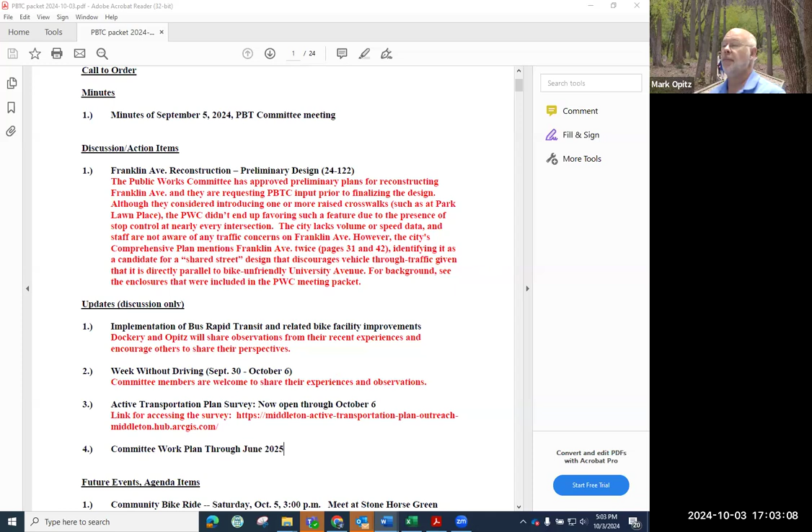So we have quorum. It is 5:03. Let's go ahead and get started. Do we have any corrections to the minutes?

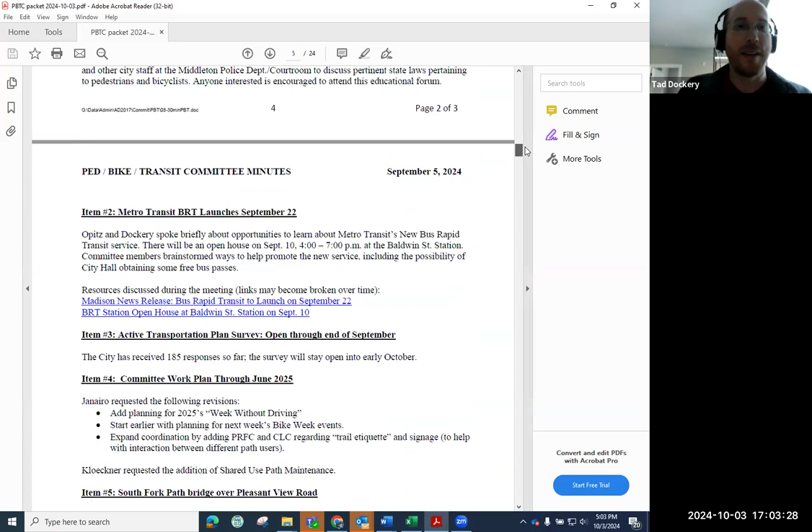I had noticed one typo at the bottom, item number 4. It accidentally says start earlier with planning for next week's bike week events instead of next year's. Oh, okay. And I think that was the only thing I saw. That's fair.

Well, I always put in one typo to see if somebody catches it.

Hearing no other changes to the minutes, they stand as read. All right, our big item, Franklin Road reconstruction. Franklin Avenue reconstruction, sorry.

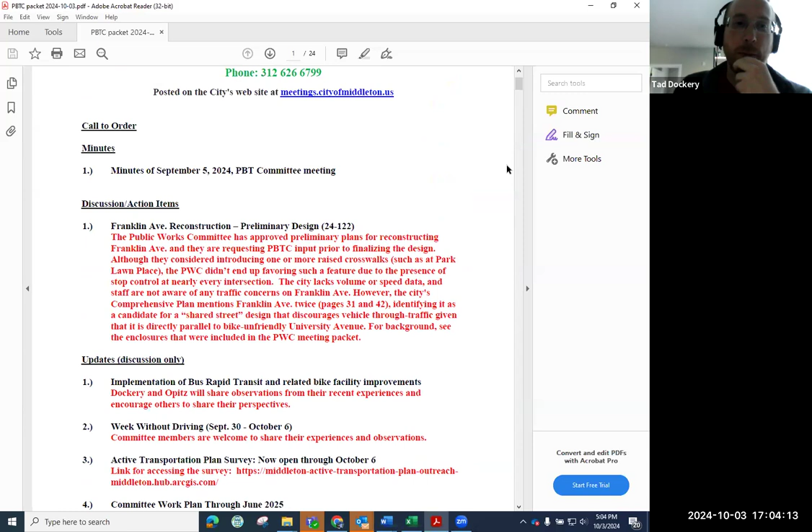Yeah. So the Public Works Committee earlier in September has been talking about how to design, are there any design changes as they prepare to reconstruct the street, developing a design for reconstructing the street. And so there was a referral, and Kerrie, I don't know if you were at the meeting. I didn't check the minutes, but I'm sure you could speak to this better than anybody on the call because you were there. So any questions about the intent of the committee? I guess Kerrie would be best positioned to answer that.

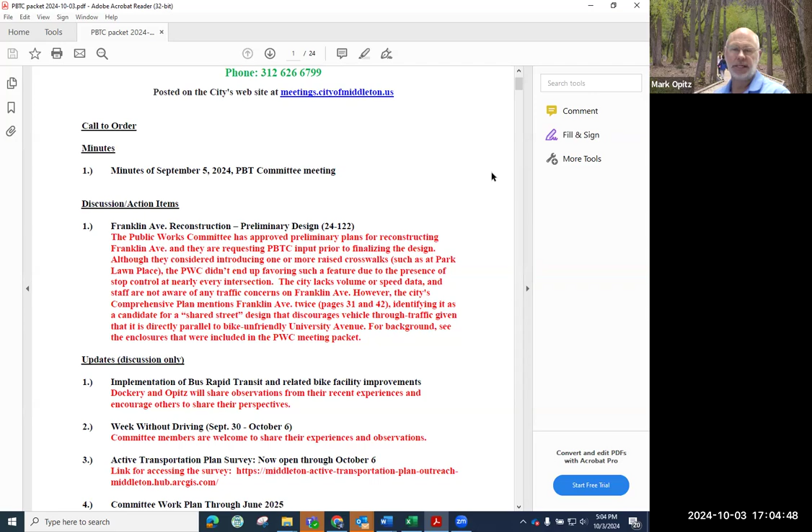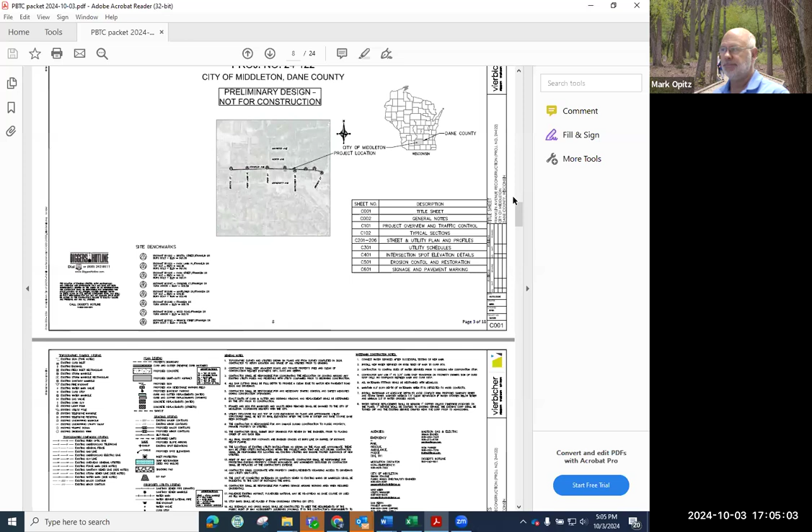But what I have in your packet is the materials that were given to the Public Works Committee, including the memorandum from the consulting engineer, and then of course the preliminary design. I will add that our comprehensive plan for the city, as I noted in the staff report, touches on this in a couple places, identifying it as a candidate for a shared street design that discourages vehicle through traffic. And we wrote that a couple years ago.

Be curious in anybody's perspectives on having biked along that route or walked along that route. I don't think it's too much of a problem at the moment, but obviously we are trying to be sensitive to complete streets and make sure that, given the limitations of University Avenue, there are suitable parallel routes, in this case, Franklin on the north and then Elmwood on the south. So I'll turn that over to the committee for discussion, and maybe Kerrie, you could shed any more light that needs to be shed.

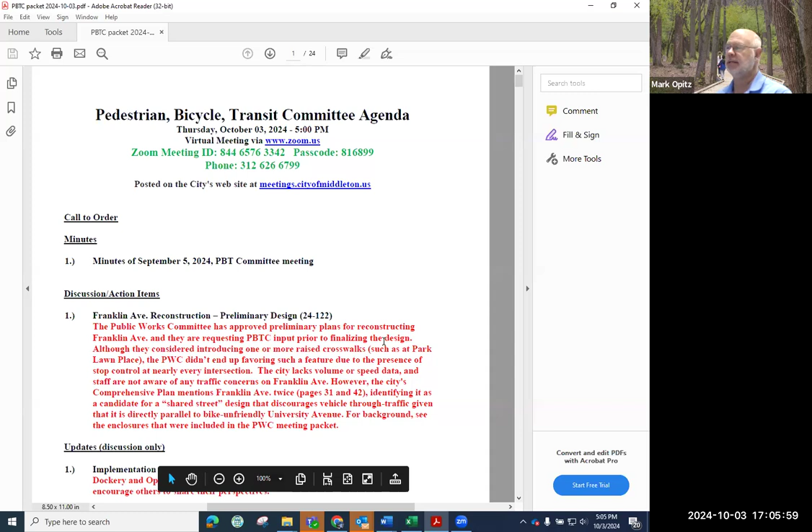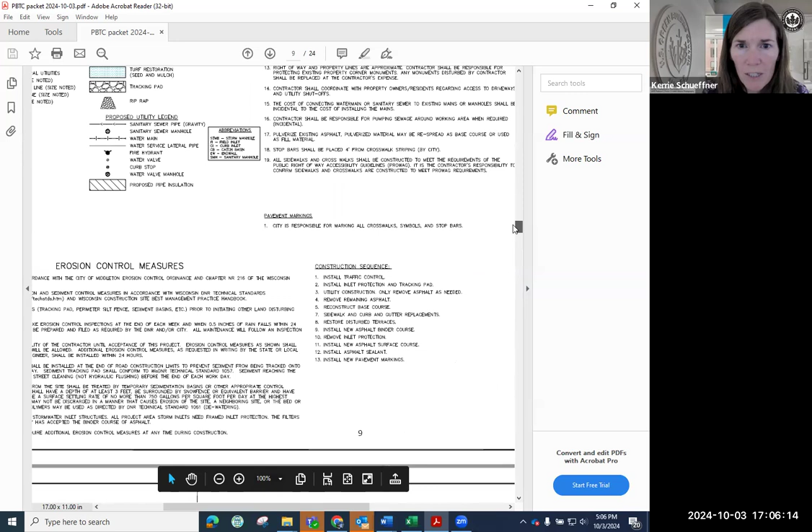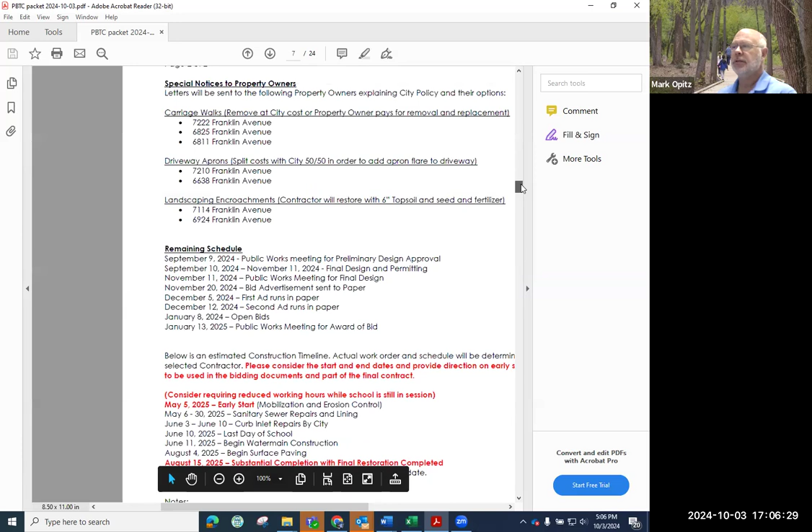Mark, can you remind us, are we just commenting on this final design? I was at the meeting, but were there any questions that were directly raised to the committee? Yeah, specifically one of the ideas that was raised, as I understand it, was raised crosswalks. I can't remember if I put the minutes of the Public Works Committee in here today. Maybe I didn't do that. You did. Okay. Well, not the minutes, but you did include the mention of the raised crosswalks. Was it my staff comments? Yeah, there we go.

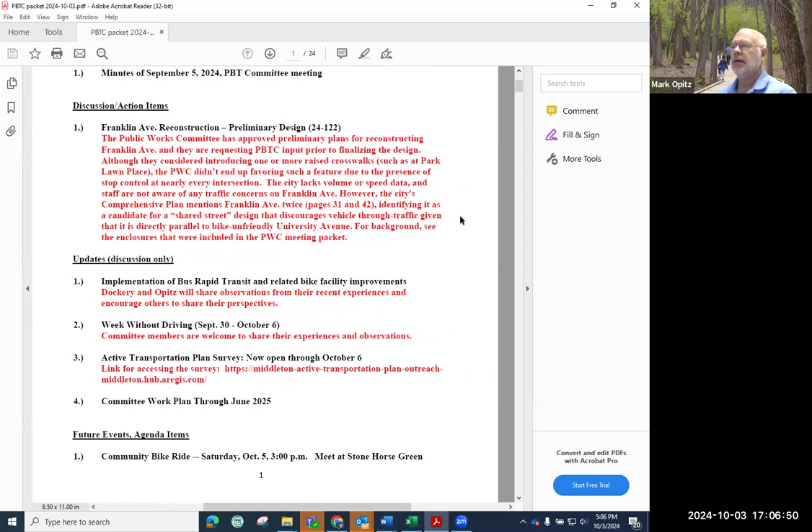Yeah, one or more raised crosswalks, such as at Park Lawn Place, and the committee decided not to favor such a feature. And the reason for that, what that means with stop control, let's go back to the map here. So if you start on the east, which is at Sauk Trail School, there's no stop control at Wood Road, but that also is a T intersection and hasn't been observed to have any problems there. People coming out of the T are supposed to be yielding, even when there's no sign.

At Mayflower, there are stop signs on Franklin heading east and west, and Mayflower is a north-south through street. Park Street is also a north-south through street, and Park Lawn is. So in this case, if you're traveling east on Franklin, you have to stop at Park Lawn. Well, actually, we were starting from the east, so the first stop you have is at Mayflower. Or do I have that backwards now? Wait a minute. Yeah, I think there's a stop at. Now I got to look that up. There's no north-south stops. There's only east-west stops. Exactly, that's what I thought.

So Mayflower. Yeah. Then you basically are stopping at every four-way intersection, not the three-way intersections. That's the quick summary. So at Bristol Street and then further west at Middleton Street, those are four-way stops. So if you are an east-west traveler along Franklin, you are stopping at every four-way intersection. So the Public Works Committee talked about whether it would be desirable to have any raised crosswalks, and they decided not to.

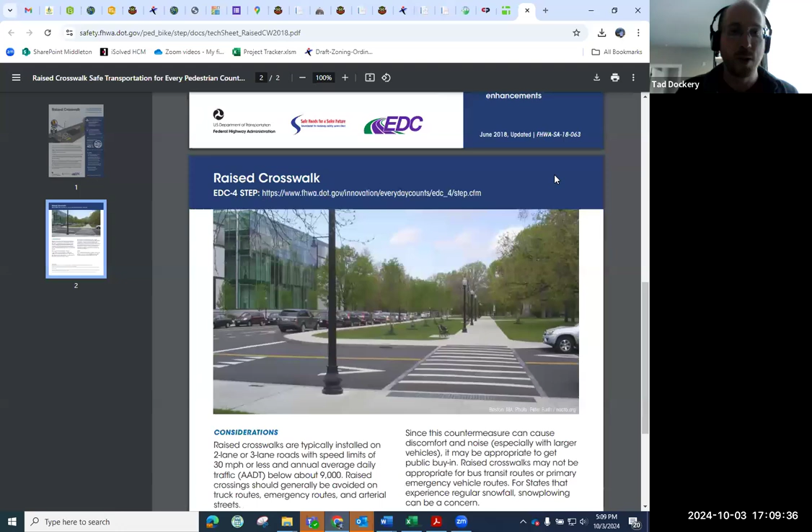So yeah, I put the link to the FHWA fact sheet. One of the images in there shows a raised crosswalk. If you scroll down, there's a photo on page 2, and you can see from the stop bar in the left of the image that that is at an intersection that has some kind of stop control. It might be a stop sign hidden behind that light pole. It could be a stop light across the street. The presence of stop control doesn't really say anything about whether a raised crosswalk is desirable.

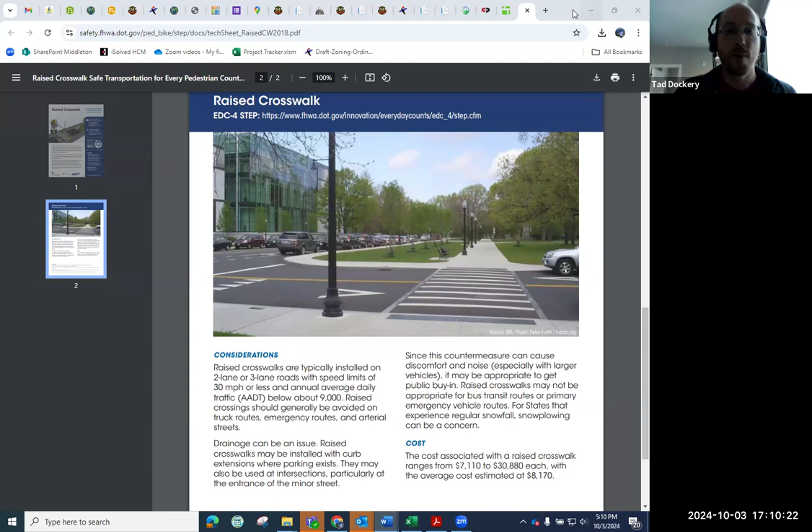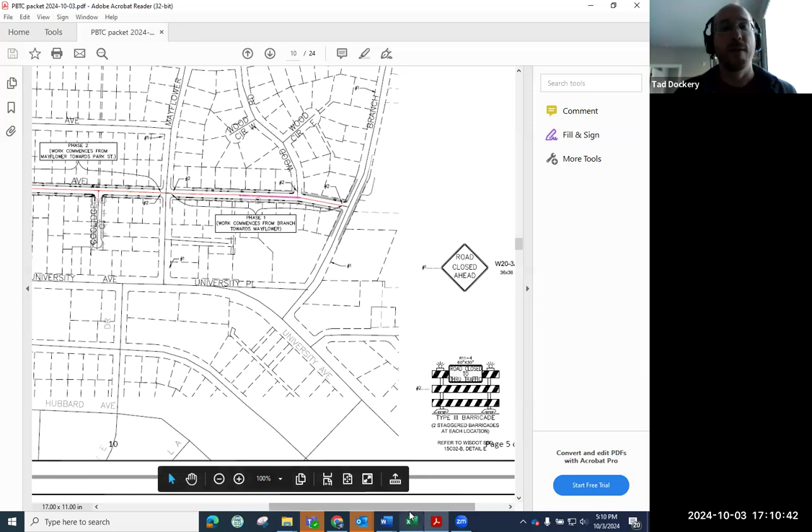In this case, the reason I mentioned the functional classifications: Franklin itself is a local, Park Lawn and Branch are both collectors. So it would be desirable to put raised crosswalks across Franklin on Park Lawn and then at Branch. So these would be north-south crosswalks. These help designate to people turning on or off the collector that pedestrians along the collector have priority.

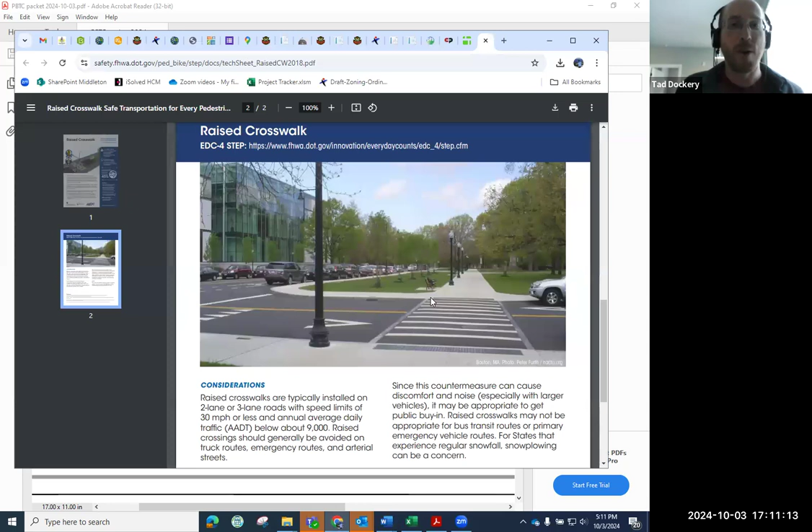So it's partly about visibility there. It's partly about reminding them that just because they're in a car, they aren't ruling the road. That's another thing about stop signs like that, is that a majority of drivers will tend to, intentionally or not, block the crosswalk. A raised crosswalk makes it a little more obvious not to do that.

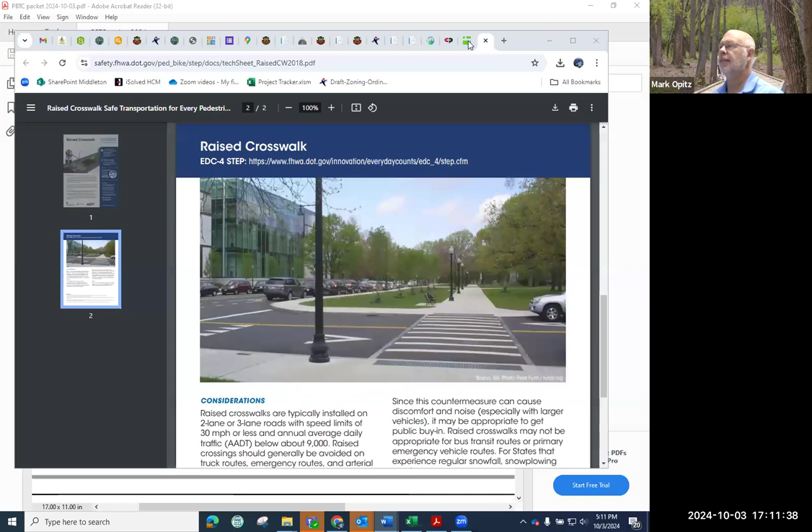And then while I'm on the explaining-why-I-asked-for-all-those-links kick, the shared street design. Yeah. So it was mentioned the possibility of making this a shared street. Shared streets are a wonderful thing. I don't think it's appropriate for this context if we truly intend for Franklin to be an alternative to University for cyclists. The relevant feature here is that shared streets slow everybody down as close as possible to walking speed.

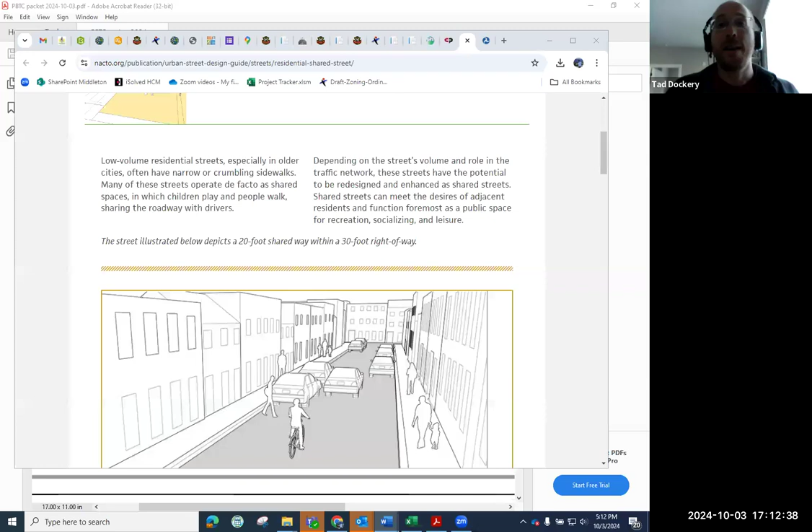The only people who should be spending any large amount of time on a shared street are people with destinations or origins somewhere along that street. So creating a low speed shared street like that, that we then send bicycle through traffic down, kind of misses the point. A better design for that is a bicycle boulevard, which was the last link.

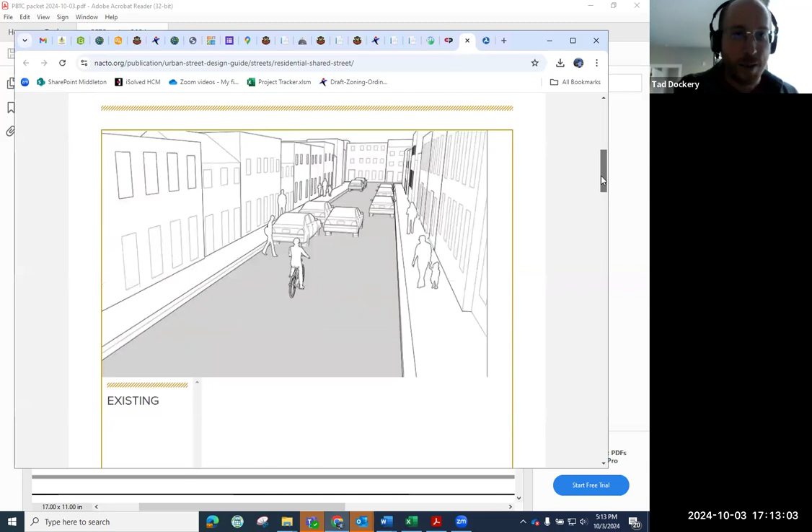Yeah, Mark, while we're here, if you click on the after picture, if you scroll up a bit. Oh, sorry, I don't know what you mean by the after picture. Yeah, so there's that spot. Oh, I see what you mean. Existing, and then it has underneath...

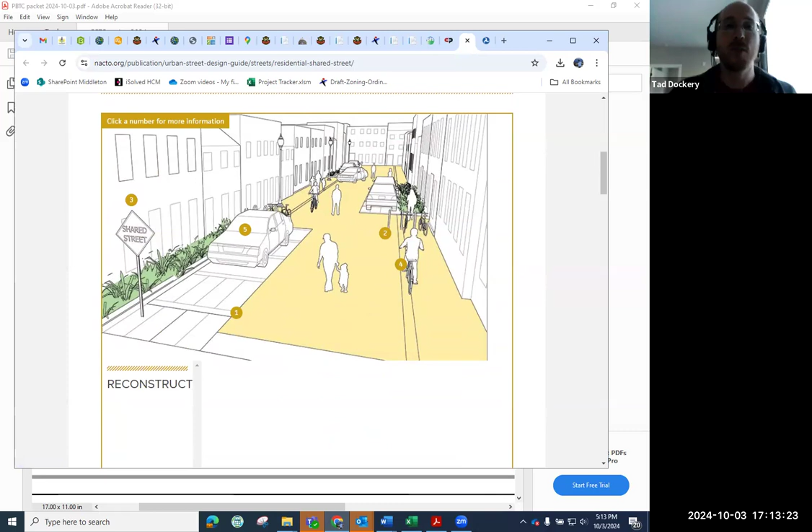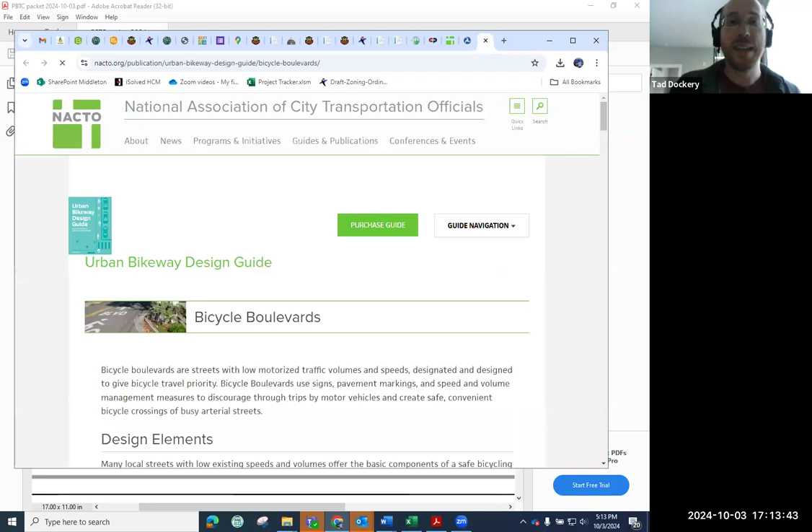Yeah, so if you see from the after, you can see the shared street, it's narrow. It alternates the sides of the street that on-street parking is on, so that drivers have to slow down and chicane around. It's perfectly reasonable for local bike traffic, but again, it's not really a good design for through bike traffic. So we kind of have to make a decision about our intention. If we intend Franklin to be an alternative to University for through bicycle traffic, then we're really more looking at a bicycle boulevard.

How long is it going to be before the next reconstruction? 25, 30 years, Mark? Well, yeah, I mean, we do seal coats and resurfacings and all that in between. Right, full reconstruction comes along once in a generation. Right. So if we wanted to bicycle boulevard it and put like mini roundabouts in the intersections, now would be the time.

The other thing I would point out is that this is the route to the Good Neighbor Festival Parade, and that has become quite well received from what I can tell. We're not going back to University Avenue for that parade. That doesn't mean Franklin will always be hosting the parade, but it is currently, and it will for the foreseeable future, as long as the festival is located where it is. So that's something else to take into consideration. And Tad, I think that context is super helpful.

And I think that's exactly what the Public Works Committee was kind of wondering, more of the reasoning of why the raised crosswalks would be beneficial. And that's where I do recall it was like, well, we're already stopping, right? So do we need these? So I think that context is super helpful.

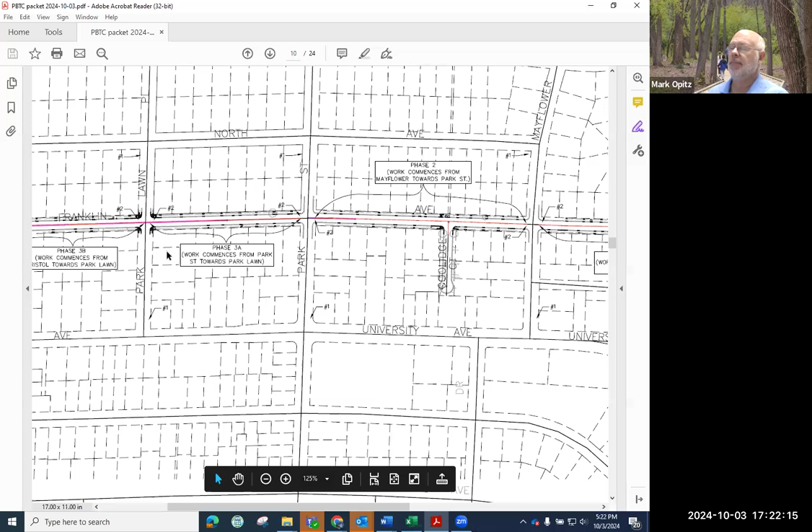And Tad, whenever that motion is, if we could include the benefits of why, I think that would be helpful. Okay. Mark, is this technically a motion for feedback? That's fine. Yeah, that'd be fine. If there's anything else, I think the discussion about the chicane effect was really helpful. I would agree. We don't want to introduce that here to have people weaving. Maybe I'm a little too biased because of my parade experience.

Well, okay, so I do want to come back to that because I do want to ask the question, do we want this to be the bike alternative? Because if we want this to be a bike alternative to University, we need to consider changes to the east-west stop signs at Mayflower and at Park. What we'd like to see is cyclists actually able to keep speed as they head towards Park or Park Lawn, and not have to slow down every time they come to a stop sign, while north and south car traffic can just keep going.

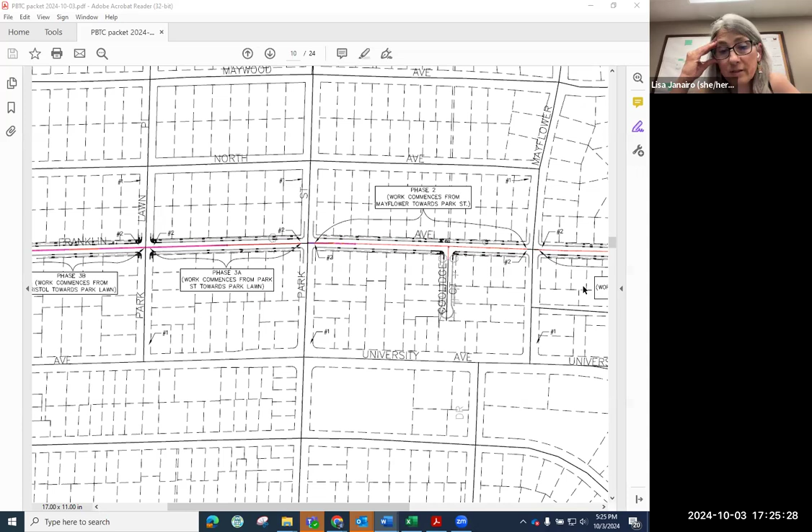I'm wondering, since we're spending in total for the street and the water and sewer over $3 million for this project, what about doing something really innovative for Middleton, doing what other cities do, where the bike lane goes along the curb and the parking lane is between the driving lane and the bike lane? We don't have dedicated bike lanes here. Are you talking about having a standard width road with a travel lane in each direction? Well, if this is going to be the bike route, since University isn't going to be it, why would we not want, okay, granted, there's probably not enough space. Is that the problem? There's not enough space for two bike lanes?

Assuming the street is 36 feet wide, which is fairly standard, that's a travel lane in each direction and a parking lane in each direction, and that's pretty much what you get. If you introduce bike lanes, then you lose a parking lane, looking at Park Street as an example, or Parmenter or Branch Street. But there are other configurations of streets, as you noted. One thing I would add is that we have seen examples now where sidewalks get replaced on one side of the street, and then you have a bike path replacing it.

Regarding University Avenue, it'd be great to have that be a complete street, but the only way we can ever put a path along University is to acquire right of way. Right. Or lose the terrace, and I just don't think that's feasible, largely because of expense, but we just don't have the legal authority to do that. So that's why we're looking at this as an option.

Elmwood to the south has also become fairly active. In fact, I would say it's probably the most active bike route in the city, because of connecting Madison and downtown Middleton and Greenway Center. And then Parmenter Street is also a big north-south route. So Franklin doesn't carry as much and probably won't carry as much bike traffic as Elmwood in the future.

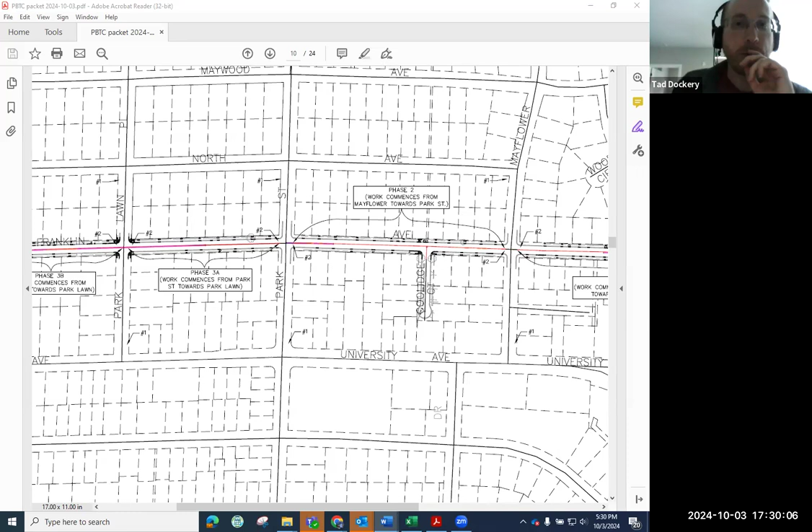So what would you like me to record? Trying to be cognizant of being halfway through our meeting time. Right. I was hearing consensus around, or no objection, I should say, to the idea of raised crosswalks on both sides of Park Lawn and at Branch. Right. So I think we are recommending raised crosswalks across Franklin on both sides of Park Lawn and on the west side of Branch.

Oh, Brad. Sorry, with the raised crosswalks, isn't that indicating to traffic to watch out for pedestrians, but not bikes, who we would be expecting to ride in the lane on a bicycle boulevard? Yes. But we're trying to slow traffic for bicycle traffic, not pedestrian traffic. So are we accomplishing that with the raised crosswalk? I mean, it's telling traffic to slow down for traffic in that crosswalk, but if we want it to be a bicycle boulevard, aren't we shifting all the bicycle traffic directly into the middle of the lane? Does that make sense? Are you asking in the context of raised crosswalks or raised intersection? Sorry, in the context of a raised crosswalk.

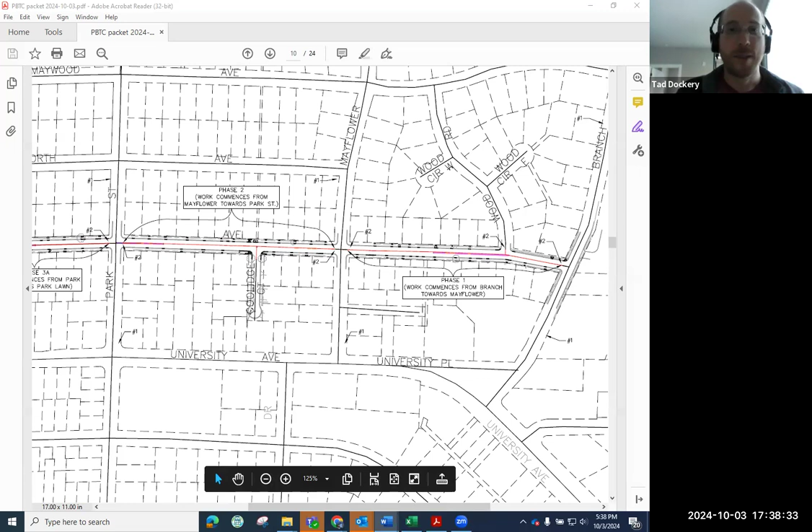Yeah, I mean, we would put one on each side here. Okay. So is that the direction you're giving? So yeah, raised crosswalks, yes. Can we spell out exactly where they'll be? So one on Branch, one going, so if you're traveling north, one across Franklin on the west side, like I'm showing here.

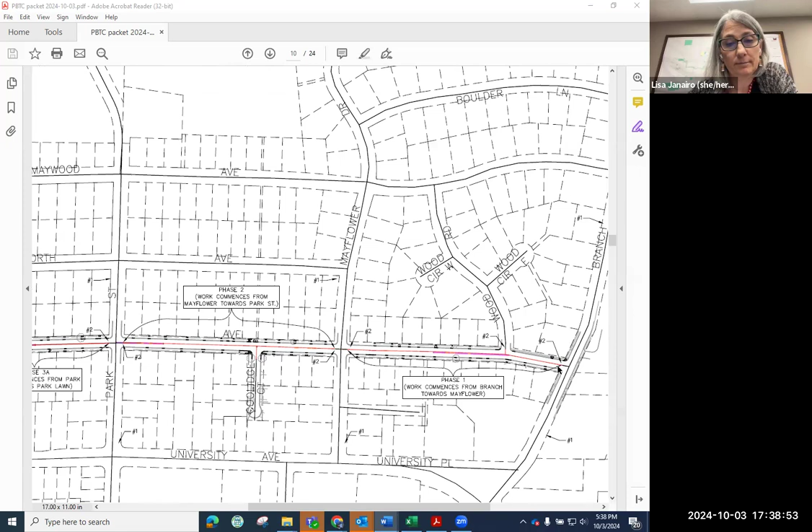I can zoom in if you want. So one like this. Well, they're all crossing Franklin, right? So one at Branch, and then each side of Park Lawn. Right. And not at Park Street too. Not at Park Street, correct.

And what's the rationale for why you wouldn't put that at Park Street? Because it's all local streets this way? Yeah, it's designated local. Well, it may be designated that way, but this still carries more traffic than another local. So I don't know if it functions really that differently. It's one thing to designate something on paper, but people are driving it like it's been a through street.

I would say too, I don't know if you've driven that before school or during lunch break, there's a lot of pedestrian traffic on there. So I think it might be a good idea to do it there as well for pedestrians. So reconstructing the ramps on both sides, or creating basically a level surface for the pedestrians going north-south along Park Street and Park Lawn and Branch Street. Okay. Is that what I'm hearing? Yes.

But I'm sorry, just to play devil's advocate. With the north-south traffic on Park Lawn specifically, why would there not be some sort of impedance for traffic to have to slow down? Because that's a collector street is the rationale, Tad, right? Right. Well, that's a variation of how sincere are we about the bike boulevard question, right? How sincere are we about our street designations?

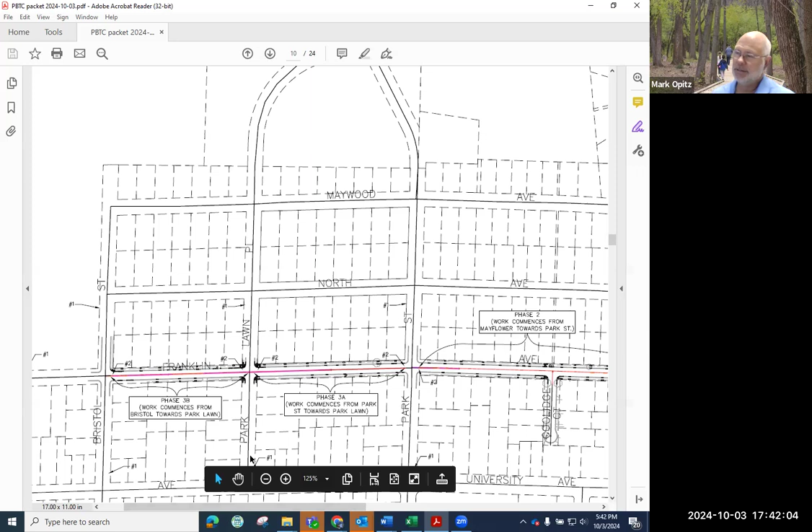It is. There's also been talk, Sean has talked about whether we need to at some point in the future prohibit left turns out of Park Lawn, because this intersection is troublesome, and there's also a very large tree that blocks views here. That's true. I'm more concerned that if we have a north-south street, pedestrians are still able to cross it. That's why we keep having requests for RRFBs across collector streets.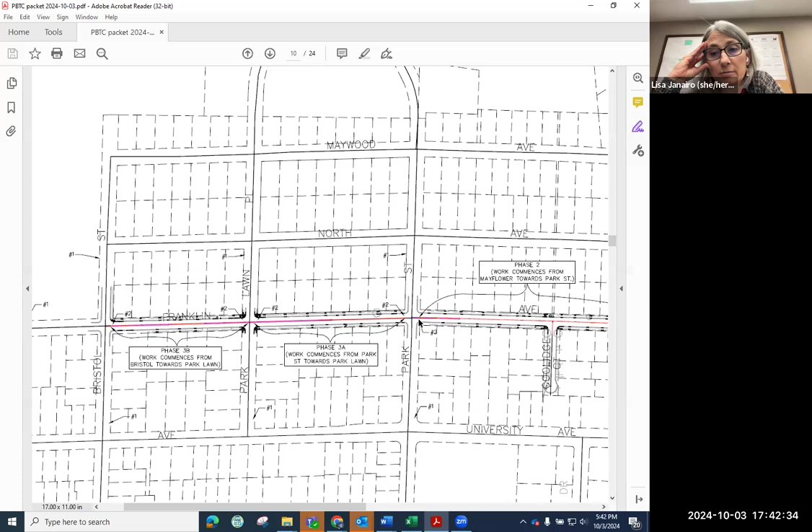We'll get another one next year, although we still haven't gotten the one for this year, which is supposed to go up at Gaylord Nelson on Pheasant Branch. Kerrie, can you ask at the next Public Works meeting when that's going to be installed? Thank you. Because maybe we need one on Park Lawn or Park next year. So I'm hearing raised crosswalks on both sides of Park Lawn and both sides of Park Street, and then at the Branch intersection. Yes.

Although, getting back to the bicycle boulevard idea, I think if there is any support for having either Franklin or Elmwood or both be bicycle boulevards, this project should wait until we know what we mean by a bicycle boulevard, what that would look like, what the impact would be for pedestrians, cars, cyclists and residents. Now's the time to do it, since, like I said, we have right now a request for over $3 million between three departments to do this project.

So I don't know if making it a bike boulevard is just a matter of paint. I don't think it is. But yeah, we should make that decision before anything happens, even with adding the crosswalks. Right. And so to jump back to Brad's point, if we do want it to be a bicycle boulevard, then we probably don't want raised crosswalks on either side of Park, because then that interferes with the bike boulevard concept.

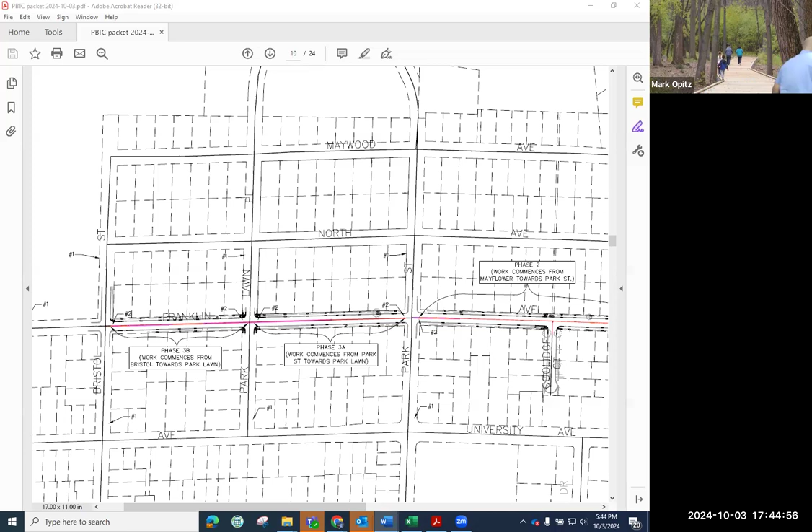Are there plans for bicycle boulevards? I mean, as we're discussing it, it does sound like more of the traffic moving through the city east-west goes on Elmwood, right? I don't think there is very much going on Franklin at this point. I mean, I think that's true, but

like I'm not gonna use Elmwood because I'm on the north side. I'm on the north side of University. It would be kind of silly for me to, unless I'm going to Sofra, then I will use Elmwood all the way. I mean, I use actually all the streets on the Maywood North and Franklin when I'm heading east. But again, they're not very busy at this point.

They're really all very quiet streets. So it's not much of an issue. You know, as I see it, crossing Park Lawn is probably the only one if I have an issue, when I think about when I'm biking.

I mean, the other issue, which is unrelated, but it was brought up, is Park Lawn without a traffic light. I do see the point of, at some point, it maybe only ought to be right turns. That's the only time I ever use it. And if I'm trying to cross with a car or a bike, I would go to Park Street because there's a traffic light there, right? That's why I guess there's more traffic than maybe it's designed for on Park Street because of the traffic light.

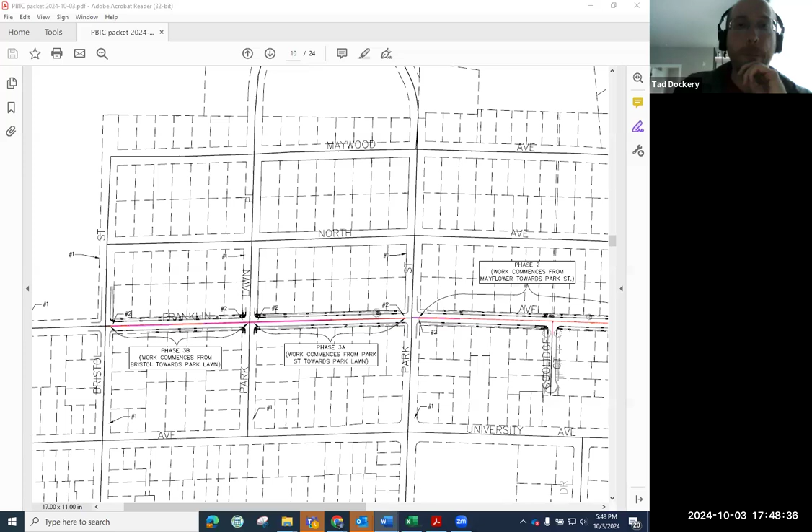Maybe we need a field trip down to Madison and ride on their bike boulevard. I'm up for a bike field trip.

Well, I would say at this point, the idea of raised crosswalks sort of at the end points and potentially in the middle sounds okay with me. I'd hate to see this project get held up. I know it's an expensive one, but there's a lot of other things that are part of it, it seems to me, that need to get done. So I mean, we don't yet have a concept of which streets would be bike boulevards and how we might do it. I don't know.

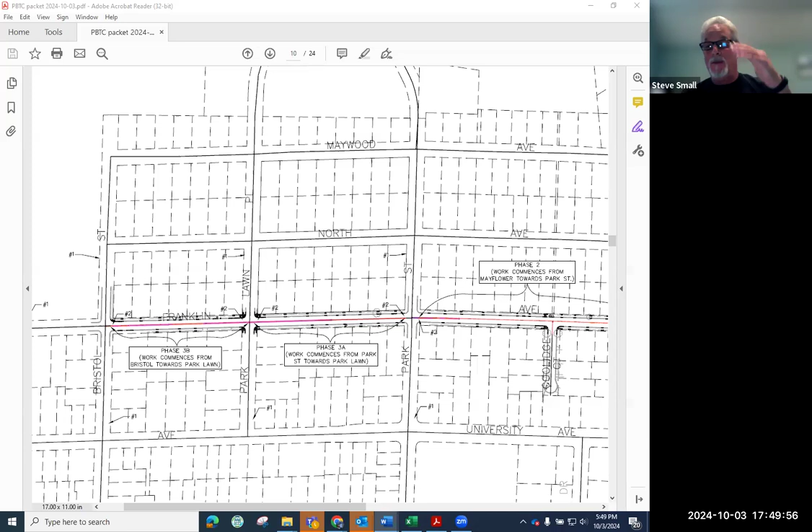Well, Franklin and Elmwood are the two that have been mentioned, but yeah, it's true, we don't have a pre-existing plan for how to actually implement that. Wouldn't it be nice? Yeah, and if I think about it, if it were a bike boulevard, it would be slowing down the north-south traffic that I'd be interested in seeing, right? On Park Lawn or Park Street. We'd want to be able to slow them down so that bikers could get across more easily and be seen, but at this point, we're not there, it seems to me.

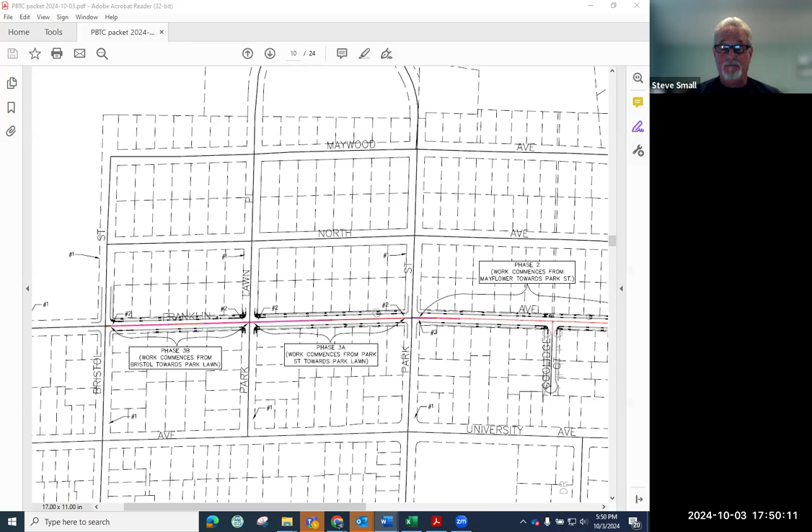I'm back. Sorry that we're having technical problems in the council chambers. Did you have a resolution on what you're doing?

I think I'm fine with what we said. So our feedback is to design raised crosswalks on both sides of Park Lawn, both sides of Park Street, and the west side of Branch.

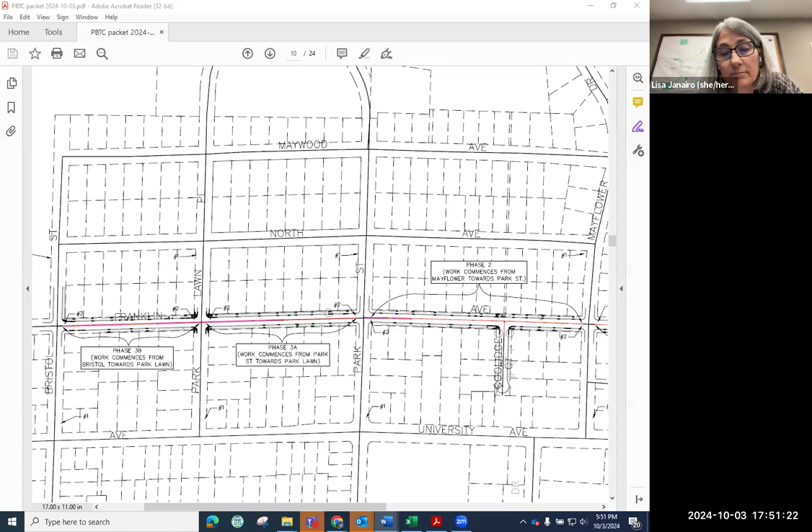Okay. And Tad, could you summarize the reason? So the reason, or the benefit? Right. So the reason is to make pedestrian traffic, to ensure that... what's the exact summary? How about to bring visibility to pedestrians in an area that sees a lot of school-related foot traffic? The pedestrians are more visible in vicinity of the two schools.

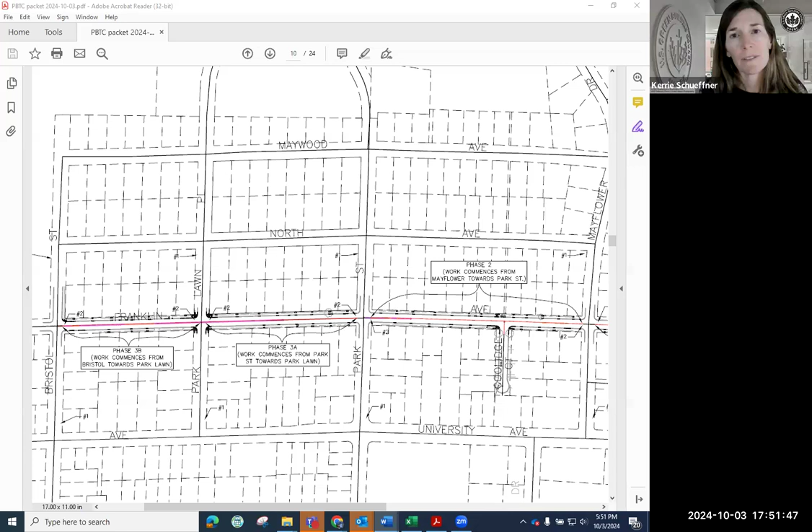Right. And the public pool? And it's actually 3 schools if you count Kromrey, and there's Sauk Trail, in Madison. The pedestrians are more visible in an area that serves several schools. And there's a lot of people driving that have recently just got their license in that area. Several schools and the pool. And the aquatic center. Okay.

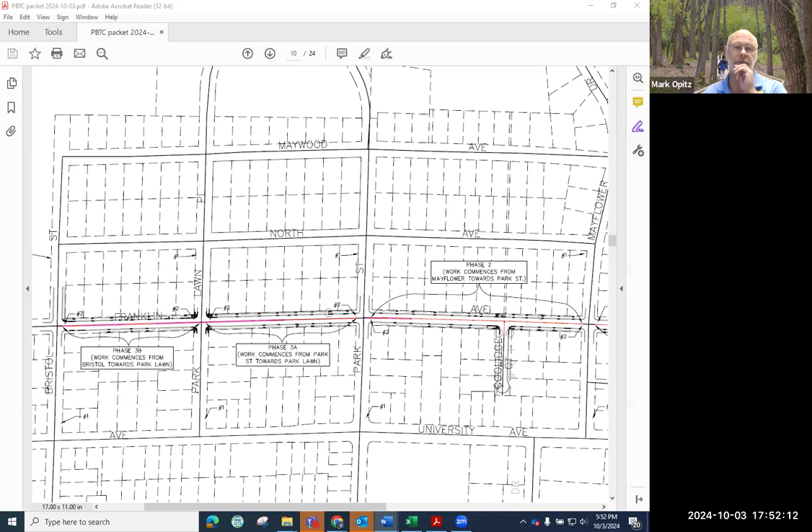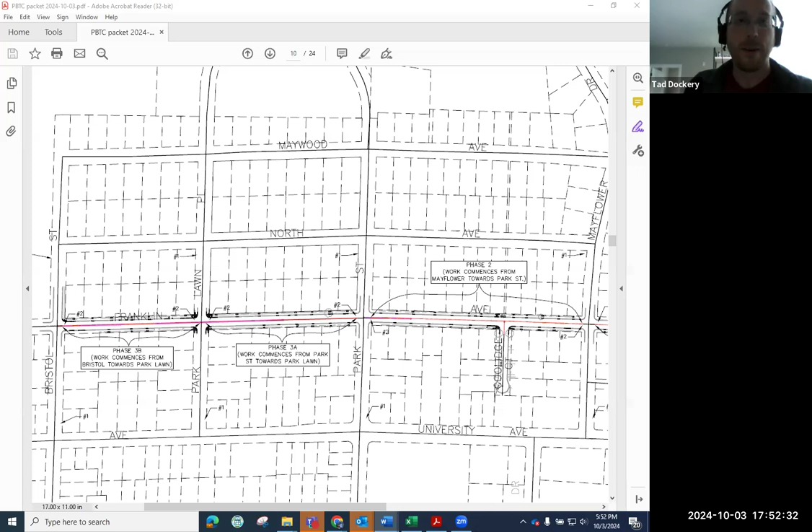Okay, is someone making that as a motion? I will make that as a motion. Right. We have a second? I will second that. That's Kerrie. All right. Those in favor? Aye. Aye. Those opposed? The ayes have it. All right.

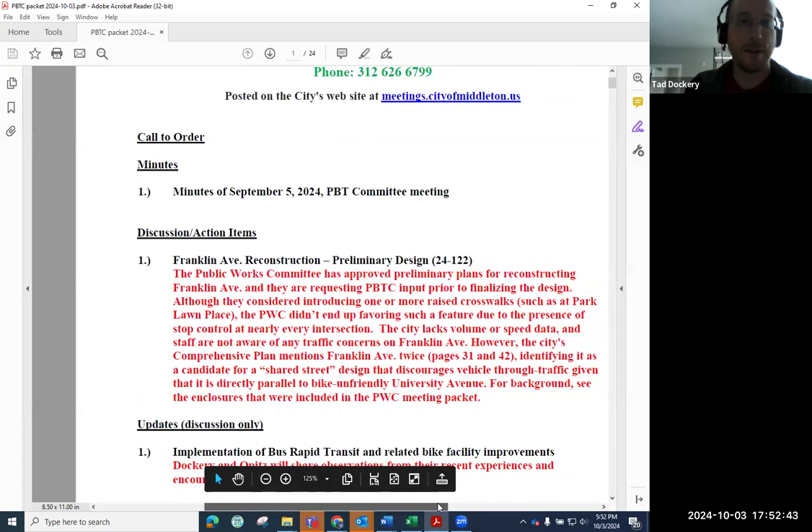Updates in 8 minutes. Go. I simply wanted to mention, as I said earlier, that Tad and I have been exploring the bus rapid transit, and I know Alder Janairo has gone on a couple rides too, maybe some of you as well. I actually had a quick video that I made that if you're willing to watch it, I can show it quickly. Tad, this is a little treat for you too.

Oops. Just a second here. Just a second. I'm in the wrong. Just a second. Do you see it now? Yes.

So this shows you the bike infrastructure that has gone in by the BRT stations in Madison. And here's a protected bike lane, which attracts families with kids. The green paint really improves visibility of where bikes are supposed to be and alerts drivers to that. Guides bikes through the intersection. This is at the Segoe BRT station. And this is one of the new stations.

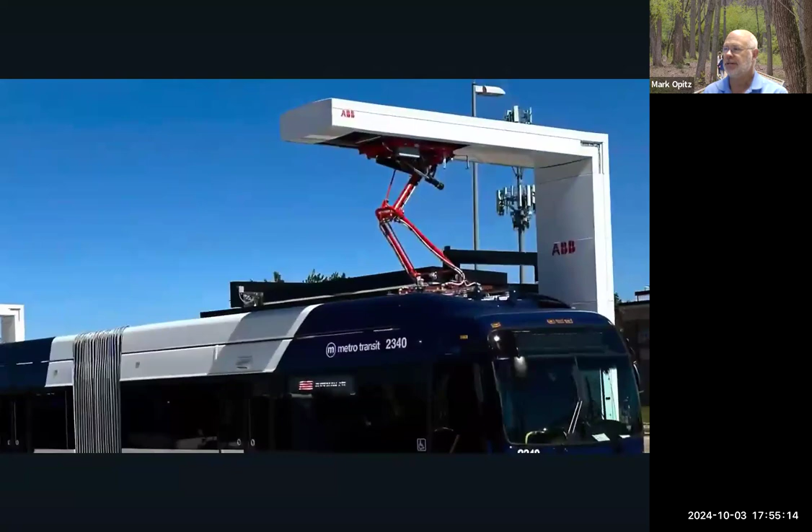So anyway, I just want to share my experiences on that and encourage you to give BRT a try. It's really pretty easy to use. I've ridden it 10 times already, 10 trips, I should say. Anybody else have anything to add on that?

Week without driving. Alder Janairo, you had a report from the council about that, right? Yeah. 3 of the council members drove, and the rest, 5, either walked or biked. Right. I was the one who biked.

So we've had some buy-in. I have not touched my car since Sunday. I took 8 different trips yesterday. So this is a good challenge for me. And well, many people started on Monday technically, and I only touched my car Monday afternoon to take my sick dog to the vet. And if I could have gotten him there on a bike, I would have.

So the point is to try and encourage people to understand what it's like, what the barriers are to driving. There's a lot of people who aren't near a bus line or don't have access to transit as efficiently as we do here in Middleton. So it's meant to be an eye-opening experience. It's not a requirement that people do this, but we are challenging ourselves.

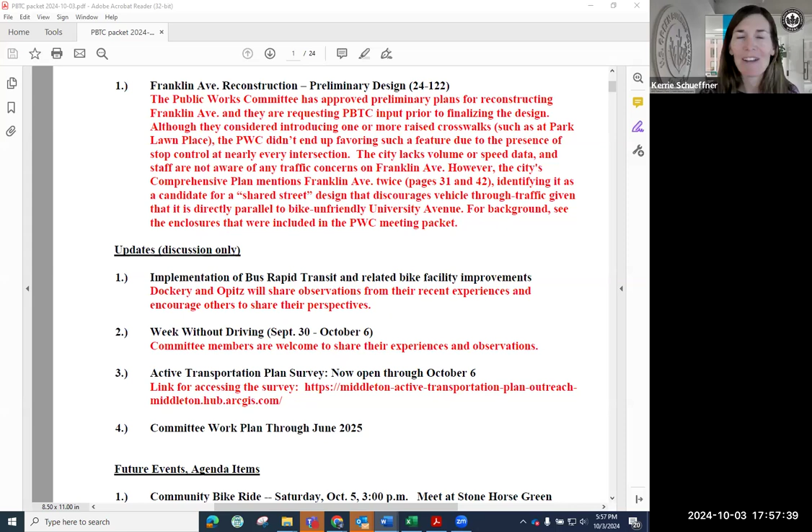Okay. I'd be happy to help with that next year, because I mentioned it to my daughter who's a freshman, and she mentioned it to her friends, and her friends said, "I've never heard of that." It didn't even cross their mind that they could maybe not drive. Yep, it's only the second time, I think, that it's been done nationally.

And so to have Dane County participate, there were, let's see, Madison was there, Fitchburg, we were there, Sun Prairie. Anybody else? Was McFarland there? I don't think so. You mean the regional event on Monday to kick it off? Mm-hmm. Schools, that's a great idea. We'll promote it more next year.

And we are doing social media posts every day here through the city, a couple listserv messages. It culminates this Saturday. You're all invited to a community event, a community bike ride, 3 p.m. Saturday at Stone Horse Green. So I hope to see you there. A very casual community bike ride, 4 to 5 miles. It's meant to be a learning experience to show people a couple new developments. Bell Farm, we'll go up there, and then make our way back on the path system west of the Beltline. So I hope you are able to make it, and I'll make sure to post it as a potential quorum.

Number 3. Can I just add one more thing about Week Without Driving? I know the origins of it are with disability rights activists, and it is to call attention to the challenges that people face when they don't have cars. But given Middleton's goals for sustainability and making our community easier to get around, complete streets and all that, I see it as an opportunity for people to see both the challenges and the opportunities. We are fortunate to have fairly frequent bus service in Middleton. And boy, am I getting an education on the challenges, but I'm also learning what the opportunities are. And I think that's a nice balance.

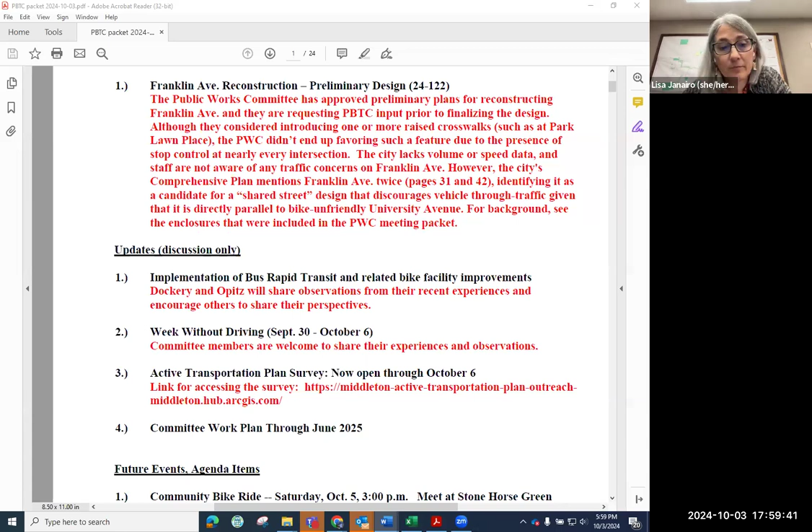And I will say this, a little pro tip. I learned yesterday when I was coming back from the east side, late afternoon, I had to do a transfer, and I had my bike with me. And at Hilldale, I looked at the platform and saw that the route F to transfer to was 15 minutes behind me. I thought, that's longer than I want to wait. So I stayed on the bus to Mineral Point Road at Westfield by West Towne, knowing that from there it's flat or downhill to Middleton. And so it took me a 14-minute ride to get back to the city. So I'm finding new ways to use our system, and it's been a great experience.

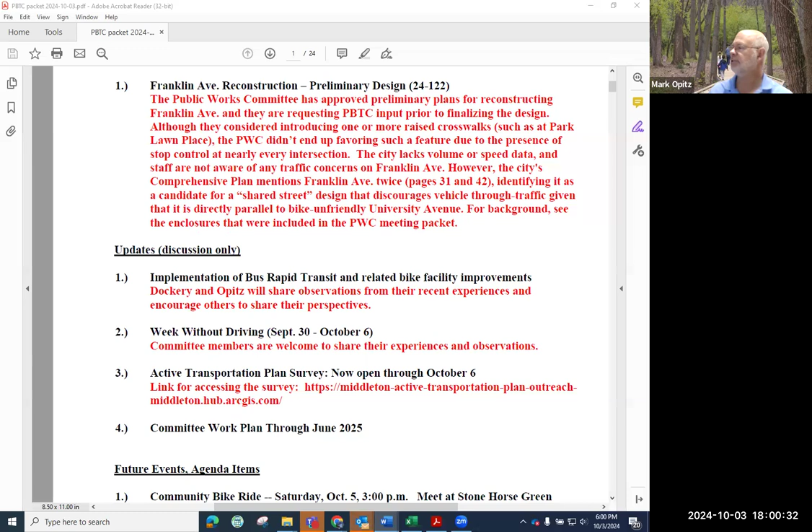Folks, I don't mean to interrupt, but my meeting is starting right next door, and when I go, we'll lose quorum. Yep. The active transportation plan is open through October 6th, and the committee work plan was just a recurring item. So I don't have anything else to update on. Okay. Thanks.